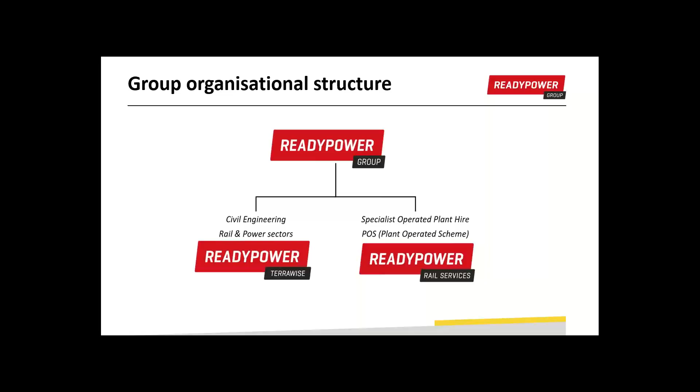Throughout the UK we've got 5 hubs, and we've done that deliberately to align ourselves to the Network Rail routes - so we're operating the southern, central, Scotland, Wales, western. 5 major depots and 2 main satellites at Bracknell and Rochester.

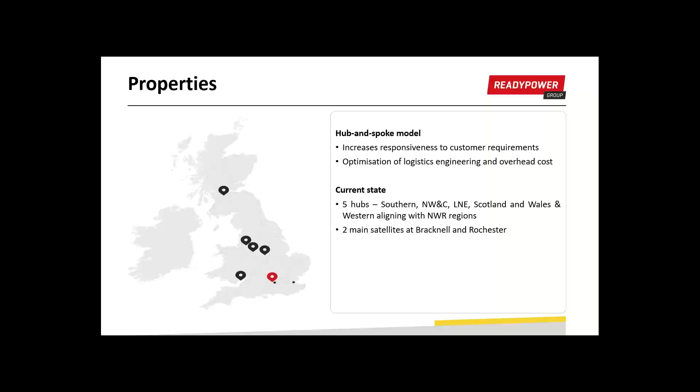A majority of the work at the minute is in the south, but we have moved into Scotland and mobilised, and for just over a year now have the Blantyre depot, which is predominantly for the plant, and it's doing pretty well as it stands.

What do we offer? Specialist operated assets - we're an asset-led company, and we've currently got the biggest road rail fleet and most modern fleet in the UK, and it services not just track renewals, but civils and overhead lines capabilities. We've got machines that service all of that.

We've now got the biggest plant operator scheme running, and whatever you think of the plant operating scheme - the POS system that came in a number of years ago - it's still there, and we still run it pretty well, and quite sizeably.

Specialist infrastructure engineering is devolved through Readypower Terrawise, and the core business, as I said, is piling, structures, permanent way. We've successfully moved into permanent way and are supporting some of the works delivery units down in the south, and ancillary civils. We've got the national 5 major operational hubs at Reading, Nottingham, Warrington, Cardiff and Glasgow.

Just a quick look at the fleet - as I said, it covers all aspects, we don't just specialise in track renewals. We've got again the biggest piling attachments in the UK, and a lot of our work has been supporting a lot of the electrification projects.

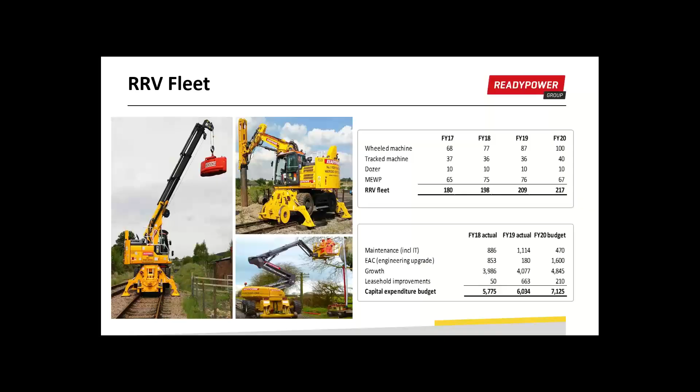Big investment - the company does invest and puts its money where its mouth is to bring new equipment to the market. I've put in a rough expenditure over the last 3 years, and you can see year on year there is sizable expenditure in bringing new kit to the market.

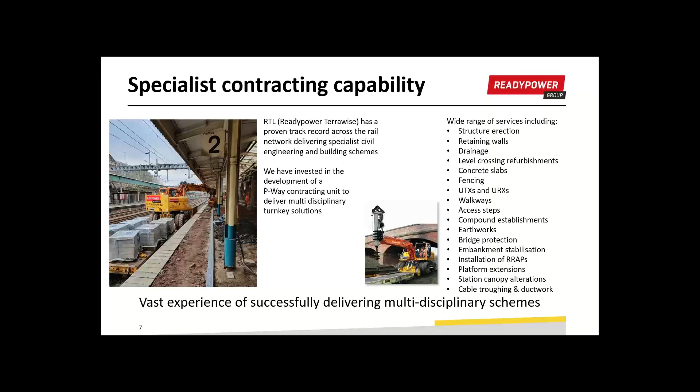Again, the specialist contracting capability covers all the structure erection, retaining walls, drainage, right through to bridge protection, embankment stabilisation. So we are doing a lot of that type of work on some of the major projects south of the border.

So that's a whistle-stop tour of Readypower, who we are and what we're trying to achieve. But the paper I put together tonight was spun on what we're trying to do at Readypower, how we're trying to make a difference, how we're trying to ensure programmes get delivered.

I've put in here some statements. I don't know if many were on the Network Rail Supplier Conference last week, where some of these statements came from Andrew Haines: the Treasury thinks rail is expensive and not value for money, Network Rail over-specify and over-engineer. I apologise if there are any designers on the call, but a lot of the time that has been the case over the years. He recognises it, and through collaboration, which was a main theme from this conference, we need to find a way forward and not just default to over-engineering and over-specifying.

So he's taking a commitment to try and move that, and he wants to get investment, to invest in innovation to drive the cost down. He mentioned decarbonisation - it's happening, and it's quite enlightening that Network Rail and principal contractors are committing to a pipeline visibility charter, so it gives a lot of the tier 2s and the SMEs better visibility of what's actually there for them.

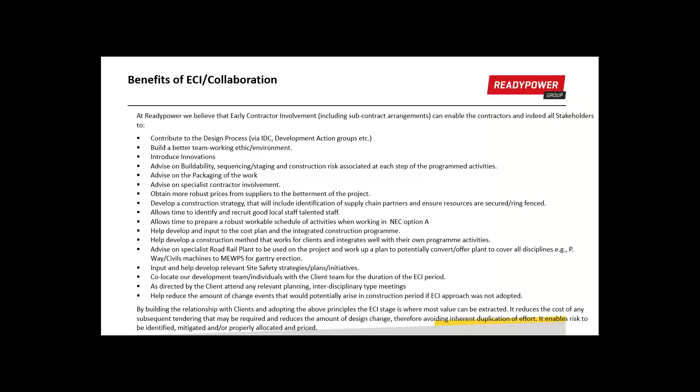And again, by building relationships with the clients and adopting these principles is definitely where most value can be extracted. It reduces any cost for subsequent tendering, because you work together, and you would like to think if you're working together you're going to come up with a solution that's both buildable and affordable. It definitely reduces the amount of design change, where a lot of the slippage - both from a programme point of view and a cost point of view - is around continual changes as you go through a project, and it really helps individuals to identify, mitigate and allocate risk appropriately and properly.

You know, again, this is one we kind of looked at - piling foundations. We discussed with the client, well, what is it you're getting? You're going to get a team that's got now 15 years experience.

TerraWise was a company in its own right that was bought out by the Readypower Group in 2018, 19. But it was, and still is, populated with some really good railway engineers. And I should say the Readypower do not make no bones about it - we're not a civil engineering company that dabbles in railway, we're a railway civil engineering company. The only other dabbling we do is in support of power, where we do some foundations for some of the contractors working on National Grid. But invariably, we are a railway civil engineering company.

So we sort of customise what needs to happen with the clients. We've got the team, the in-house engineering specialists. We've got full design and build foundation, which a lot of clients like and like to get us involved in. As I mentioned, we do a lot of line-side ancillary civils, and we now have this in-house PWay capability and a pretty good, strong team.

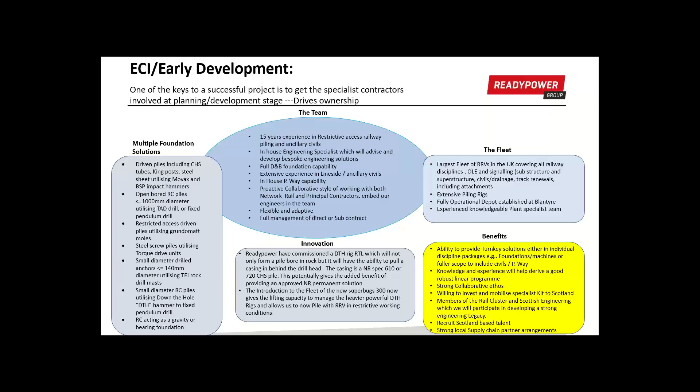What we would do is sit with the client and go through that - what's the benefit of doing that? We would work out, right, we'll put the team in, we'll help, and we'll be right in from day one. So that's really a typical example of how we'd look at working with principal contractors, to be there right at the beginning and help influence the programme and achieve the programme's milestones.

At that point in time, it was Carillion - when Carillion were still around - Balfour Beatty and Murphy. So right through to some of the resignalling projects, we were at Wavertree, working around with Buckingham's and Siemens, where we took all the substructure and the structure erection work, and it worked really well. All of these really put them up as a good exercise in how collaboration should work.

Similarly with some of the P-way works we're now involved in, because we've got the kit and we can help, particularly with the work delivery. We're nowhere near a Balfour or a Colas or a Babcock in terms of scale, but we do have a good capability that can help and bring this whole programme together.

Again, Southampton Freightliner is a great one, because that meant we worked with Colas, and the plant was brought in to work out plant requirements for the track, and equally we landed all the foundation work, all the steel and all the foundations, and it worked really, really well.

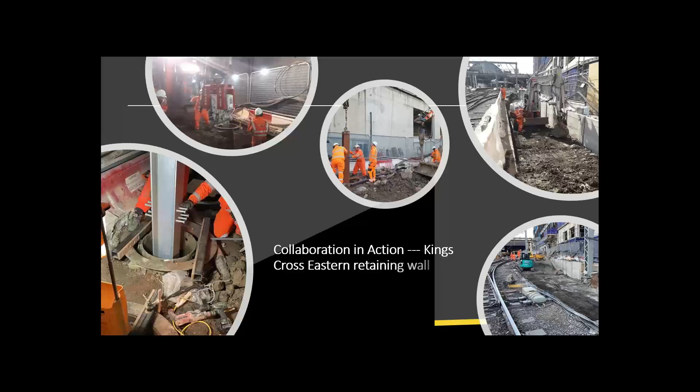And some of the good testimonials that were in there on that. If I look at currently, we still work that way. We're currently at King's Cross on the eastern retaining wall. We had been engaged and undertook the western retaining wall.

One of the challenges on the eastern retaining wall was that a lot of people were shying away from it, but we worked with Morgan Sindall and Network Rail to come up with a solution. The big issue over the years was the current Google head office right adjacent to where we're working. Colas, Network Rail, and part of the major remodelling works at King's Cross needed to lower the track through there, so we worked out a way of putting a King Post retaining wall in there, with very restrictive and reduced possession times.

I'm glad to say we're still in there, but pretty much on programme, working well with the team. We've been embedded since day one, and we expect to finish that over the coming month or so. It's been pretty successful, and allowed a lot of the remodelling work to be undertaken in the major blockade recently at King's Cross.

One thing worth mentioning, I put this in - a survey that was undertaken by the PMI, the Project Management Institute. It's an American report, but it did cover some 4,000 or 5,000 projects worldwide, including Europe. So although the values are in dollars, it sends out the message. This survey was undertaken in 2018, so it's fairly new, and it's probably the first time the industry has tried to put a value on project performance.

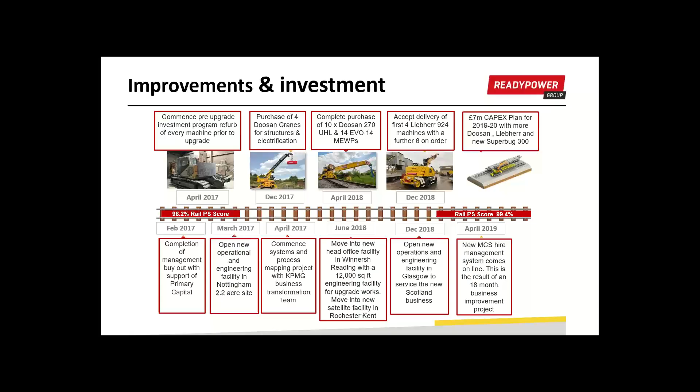What we've done in Glasgow is that every piece of machinery in there is pretty much brand new, because we're embarking on a journey to replace these old, worn out diesel engines. So a lot of investment, and we've moved a lot to bring that about.

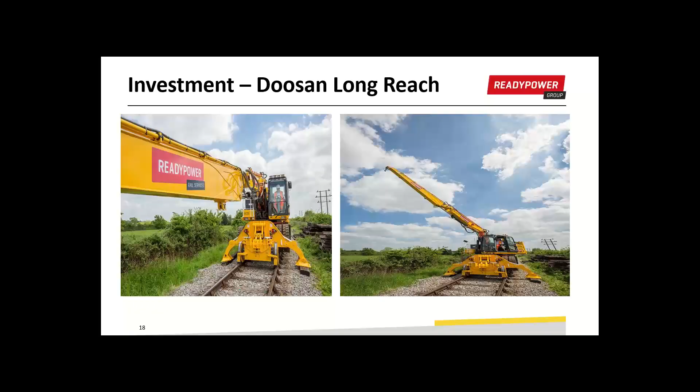As I mentioned, the Doosan long reach machines are getting used particularly well on a lot of the electrification projects and some of the bigger projects down south, and right to one of the ones we've got in Scotland, we've got quite a few of them here.

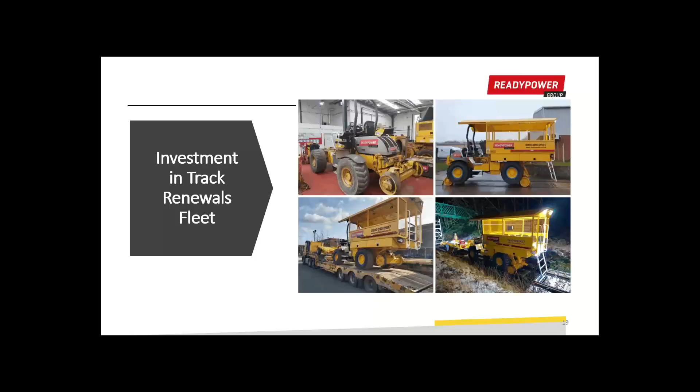Realising the need to get people to site quickly to maximise short possessions, we now have a fleet of personnel carriers that can take up to 14 people and can also trail kit behind them. They're getting used really well, particularly on a lot of the track renewals, where the access points tend to not be that close to the work. So we've now got a fleet brought into Scotland, and that's going pretty well.

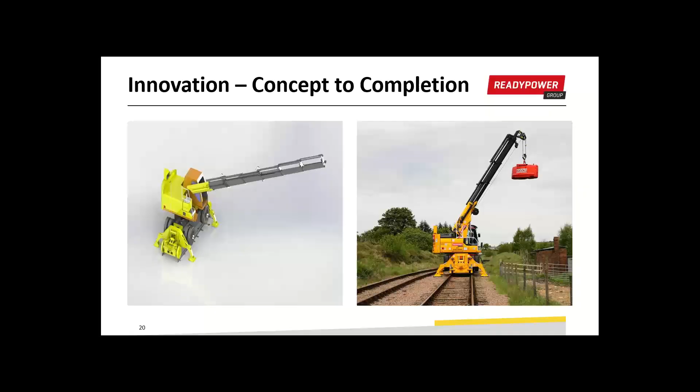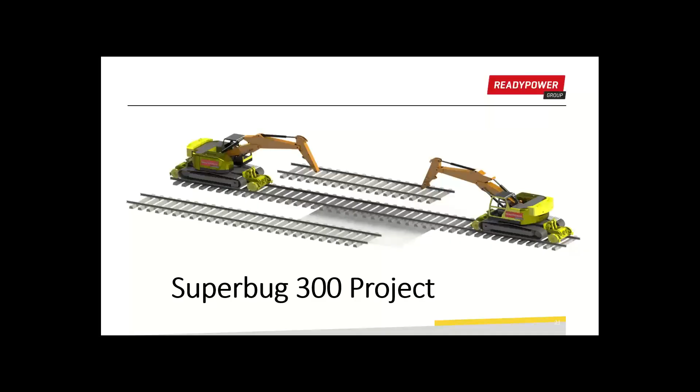The Superbug 300 project is one I'm going to spend a wee bit of time on. This is our latest innovation that we've brought to the market. It commenced in 2017, so the company was asking, what do we need to do differently in CP6 to hit all these targets and manage the programmes of renewals.

We knew at that point in time that things were going to change. It would come back to the three alliances which were going to be delivering S&C and plain line. So we looked at it, and the scope was simple: design and build a disruptive machine for the track renewals market. It had to have leading performance - we had to do something different. As a company, you should always be striving to do something different. What is your unique selling point? What can you bring?

If you're just bringing another machine, then great, it's new, and it'll tick all the boxes for the new environmentally friendly machines. Absolutely great, but we needed to do something different.

So we looked at a standard Trackrailer, a 13-ton excavator. For the Super Bug, we converted a 25-ton excavator, but we needed to do that around the current restrictions on the railway - I think it was W6 that we worked to. It had to have superior lifting capability, superior digging capability. We always wanted to couple it up so it could lay sleepers, and we've developed a new 14-sleeper hydraulic spacer.

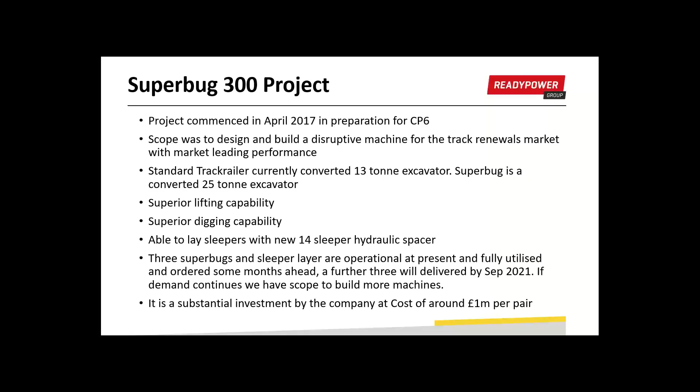So looking at some of the ability to lay the 14-sleeper hydraulic spacer, there's also the Bluetooth tandem lift technology to enable the lifting of 60-foot panels. We wanted to give the machines the capability, working in Bluetooth, to stop a further down rating, which would allow us to lift the 60-foot panels. They are heavier - the overall weight now is 35 tons - but they are compact and can work in confined spaces, as you'll see in the further slides. So we've seen it in the strap line as an RRV that would lead the market for the next decade.

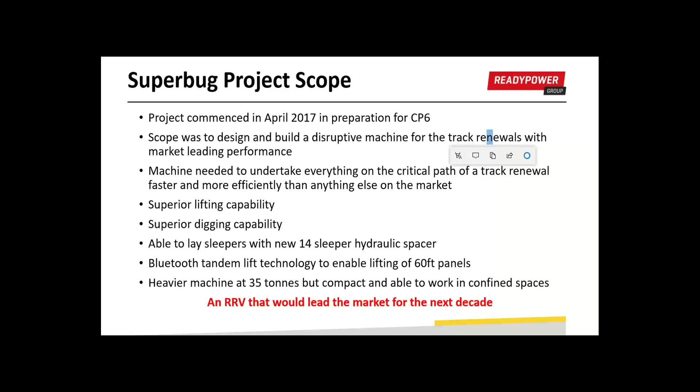The problem was, the challenges - some of which I'll quickly go through with you. We had no factory-ready base machines that would fit W6 gauge for what we were trying to do, so we married the undercarriage of the specialist narrow gauge with the top half of a zero tail swing. Again, the front end of the machine was too high for working under overhead line, so we had to do some major redesigns.

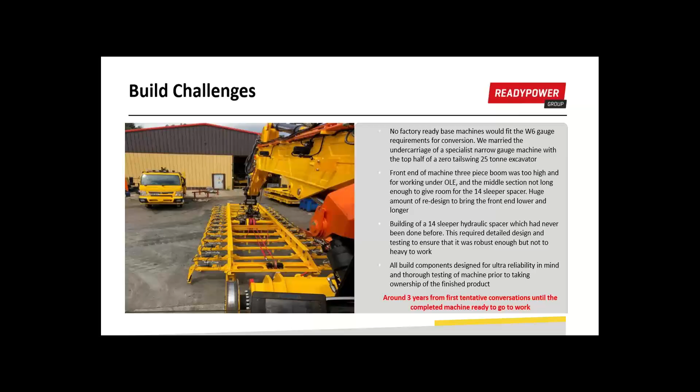So we built the 14 sleeper. As far as I know, there was a 24-26 sleeper being done with the gear-off cranes, but we're not aware of anybody that's built a 14-sleeper hydraulic spacer. That required a phenomenal amount of testing and detailed design effort to get there, and as with everything we do within the company, we had to make sure it was ultra reliable. From the first conversations about how we were going to do this, it took 3 years until we had the first machine ready to go. So it's a lot of money invested in research and development to get it where it is.

We wanted, as we talked about in this slide, the Bluetooth feature. We were testing it at that point in time, but it's now live, and we've undertaken our first jobs for Central Southern Alliance, lifting out 60-foot panels. So that is now happening.

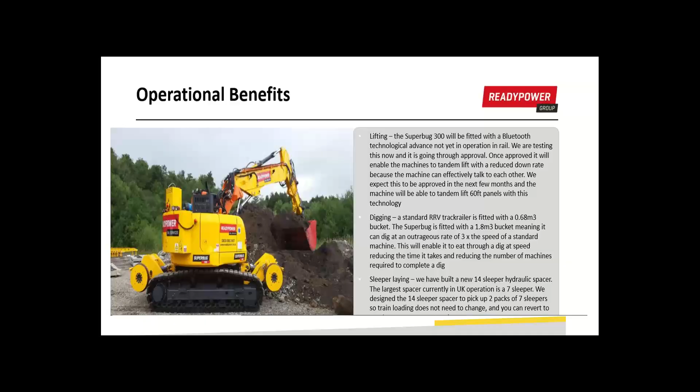The digger is a phenomenal digging machine. It's fitted with a 1.8 cube bucket, and it gives us the ability to essentially excavate three times the speed of a standard machine. Similarly with the sleeper laying, we built the 14. Currently it gets picked up in the 7 at the minute, but we designed the 14 back to the 7, so we don't need to reconfigure the salmon wagons - we can still lift off the current wagons.

Again, Superbug is designed to undertake everything in the critical path. The critical path we talk about for this machine is the digging, the bottom ballast, lifting out the track in the 60 foots, and putting the sleepers in. Generally on a track renewal, these are the ones that give you a lot of the problems and lost time.

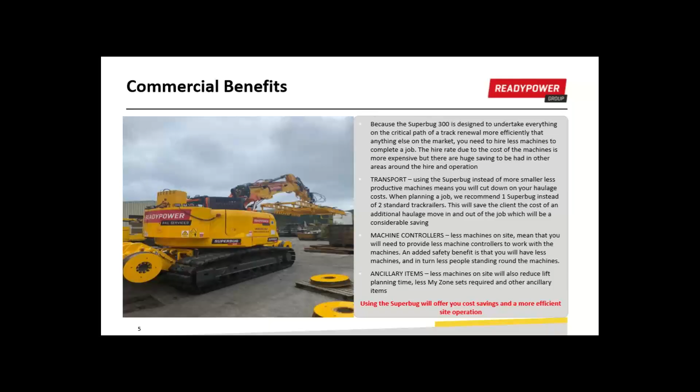One of the environmental benefits was always high on our agenda when we put this together. We know Network Rail's task to reduce emissions by 25%, and that was a couple of years ago when we put this together.

As part of that drive, we needed very efficient machines, Tier 4 AdBlue engines, which reduce emissions by 86% less carbon, 86% less particulate matter than the old machines. Some of the older machines that are still there work well, but they're not great for the environment.

In hand with what we're doing at Readypower, we're upgrading the fleet. We've now got 40% of our fleet overall at Tier 4, and by the end of this year we want to get up to 50%. So we're making a massive positive impact on environmental benefits.

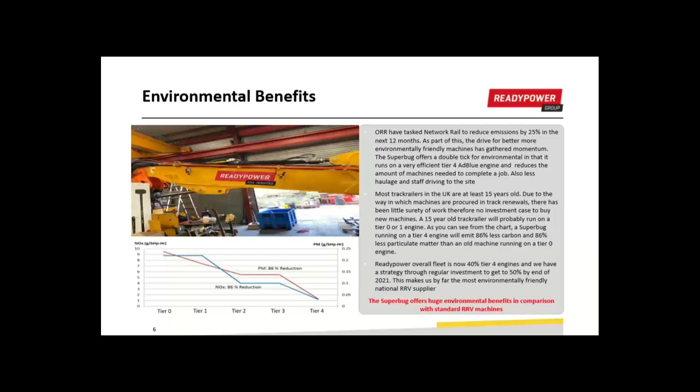We work in conjunction with GOS, who we do a lot of work with, and in turn work with Doosan. We've got an exclusive arrangement, and at that point in time we were looking to have a fleet of 10 by the end of 2021. We will have 6 - COVID put a bit of a dent in our expectations. But the more we see it getting worked, we'll press the button again to get us up to that 10.

As I said, we intend to build more 14-sleeper hydraulic spacers. We've got a few more coming online, which are working really well. Don't get me wrong, at the beginning it did take a bit of looking at how you do it and how you use it, but quickly, both operators and the track mules guys got to grips with it.

You would only use the Superbug with the appropriate wagons - it needs to be the bigger capacity wagons that can take these scoops of excavated material in one hit. It can work under overhead line, and it's now passed to work adjacent to the open line. That was a wee sales pitch, but it's getting pretty much booked solid for months ahead.

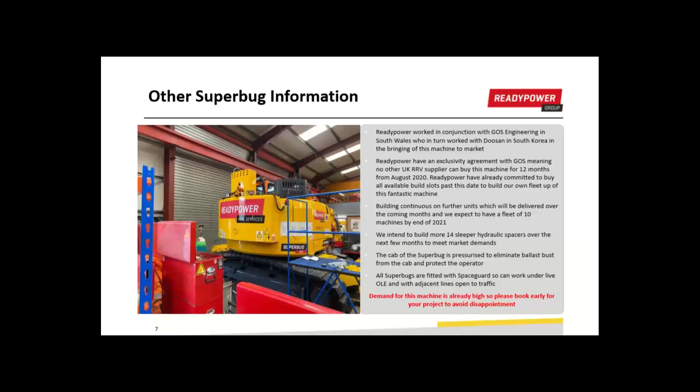What we've got here is just recently - that's the blockade where we had Superbugs working at King's Cross and the remodelling works. The eagle-eyed amongst you might spot the retaining wall over to the right that we had to have in prior to this work commencing to allow the track to be lowered through there.

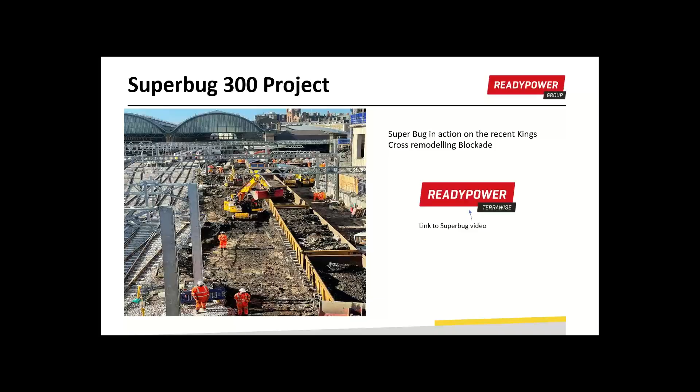There is a link here to a video, but unfortunately, when I transferred over to this platform, I had a bit of a struggle getting that to run. It's only a couple of minutes and shows the Superbug in action, but if you go into YouTube and type in Superbug, Readypower Superbug, you'll be able to have a look and see it in action. It's going pretty well.

One of the things we looked at - it's easy to say it's bigger and faster, but what we've done is looked at a conventional Cat 11, I think a 1,000-yard Cat 11 job that's been delivered and successfully done. We applied what-ifs using live data, because this is a Scotland job we picked and looked at - now we've got live data because the machines are working, we know the rates, we know what they can do.

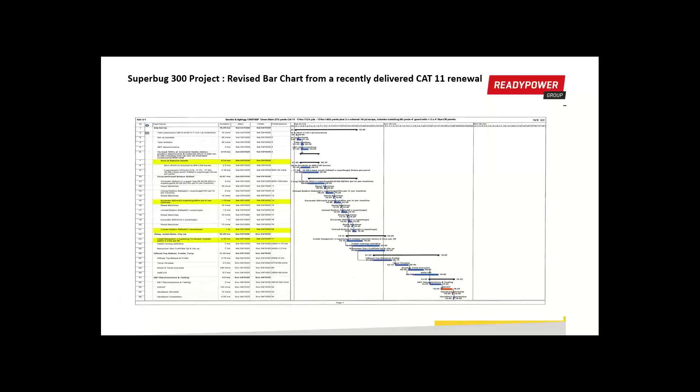Same with excavation - it was a fairly long time there for excavation, 11 hours. Superbug would do it in 7.

Similar with the bottom ballast, 4.5 hours better. Install sleepers, 2 hours 15. Let's see that - mathematically it's pretty simple, and if it digs and stones up 3 times the capacity, it should go 3 times faster.

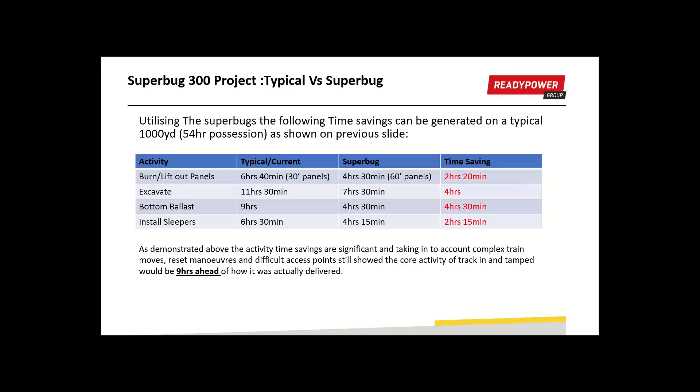But then when you factor in the complex train moves, reset manoeuvres, difficult access points, which we looked at on that previous job, we still came in 9 hours ahead on the core activity being complete - track in, tamped - and it was brought back in on time. You're now seeing the impact, not just from time on site, but what that gives us as potential project benefits.

In addition to the obvious operational, environmental, commercial benefits I talked about previously, if a holistic view of any project is taken, there's a number of positive variants - less time requirements for engineering trains on site, saving at least 1 shift in the core renewals, less requirement of safety critical staff, machines, etc. The savings can be generated as a cost saving or a production increase. Either way, it improves the unit rate for both S&C and plain line jobs.

And undertake the additional welding stressing now within that 9 hours you've clawed back, also reducing the requirement for costly midweek follow-up on non-cost effective possessions. The reduction of possession requirements generates opportunities to significantly reduce Schedule 4 compensation payments.

So you can use that - you might say, I no longer need a 54-hour, I only need 40 hours or whatever, and the Schedule 4 payments to TOCs would be adjusted accordingly. And again, a planned activity says 5 weeks, you might then reduce to 4 - so you've saved a full weekend.

There are lots of ways - what I'm trying to say is lots of ways how you get the benefits out of using it. And again, high potential when you do any tracking for Schedule 8 compensation payments, which would be significantly reduced, because you probably will do the stressing on the core work. There's no requirement for heat-related TSRs to be imposed, so there's no restriction on pathing and train headways.

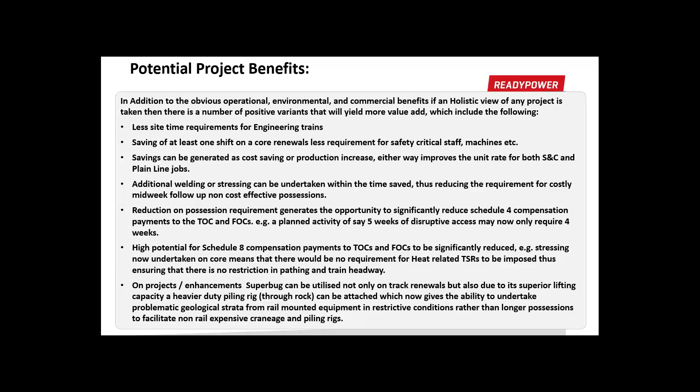Just to finish off, obviously a lot of everything we do is done safely - that's our mantra, just to make sure we instill that within all the work at Readypower. And again, it's a simple innovation that we brought in.

So I've went through that, hopefully not at too fast a pace, but I thought there's a lot to get through. I hope you've enjoyed the session. I'm going to hand you back, so again, thanks for taking the time to listen, really appreciate it. I'll hand you back to Craig, if that's okay.